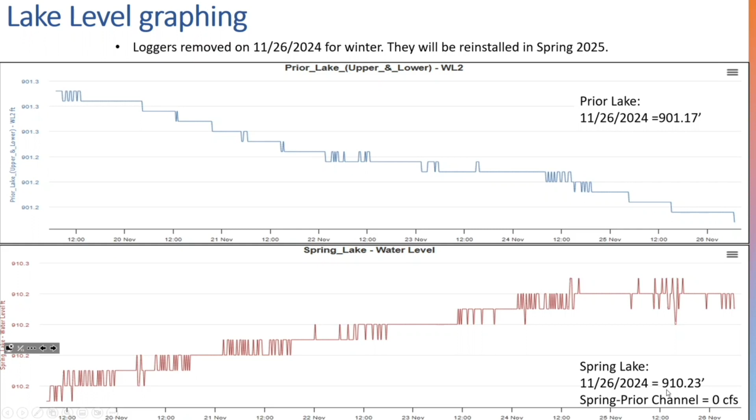For the lake level ending of the year, 2024, Prior Lake is at 901.17, and Spring Lake is at 910.23. The lake level loggers have been pulled for the year, and we will install them as soon as possible in the spring. One comment on this, the graphing, I think we figured it out, and overall we've heard good feedback this year on our lake level graphing website, and we're pretty thankful that we got that dialed in.

We've been reaching out to ice observers this past month, and we have gotten reports that Upper Prior Lake iced in, which is how we define that, when the lake is 90% covered, on December 2nd, along with Fish Lake and Spring Lake. Lower Prior Lake officially iced in on the 11th. On Upper Prior Lake, we've had data from residents shared with us since 1966. Overall, the trend seems to be climbing, though each year is a little different. Sometime between November 23rd and December 7th is pretty average, so this year we iced in sooner than typical. Always interesting. Thanks to all the observers for submitting their data.

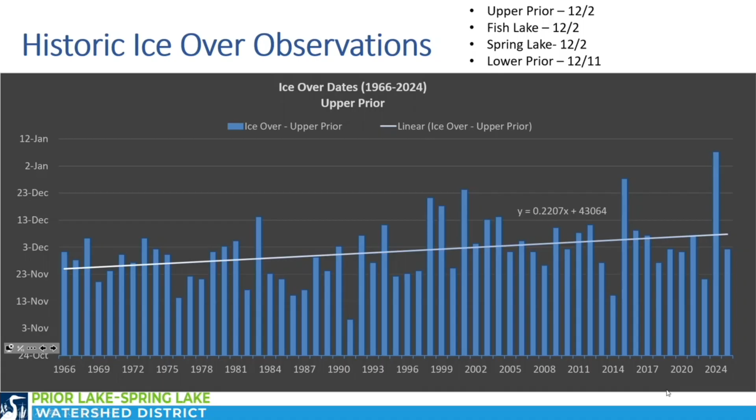I'll be talking about the 2024 lake water quality results. These results were a culmination of annual sampling that included 12 bi-weekly events. I'll go through the Tier 1 lakes, which will be Lower Prior Lake, Upper Prior Lake, Spring Lake, and Fish Lake.

Our sampling team at Three Rivers Park District samples total phosphorus, chlorophyll A, Secchi disc, total nitrogen, and chlorides. To compare our results to state standards, I'll be mostly focusing on total phosphorus, chlorophyll A, and Secchi disc. The state standards are based on data collected between June through September.

For these results, I analyzed trends and we made report cards. The report cards provide grades based on state standards, frequency and amplitude of the lab results, the seasonality, and the statistical significance of the trends within the last 10 years. These report cards are all available on the district's website, along with the annual data and historical trends.

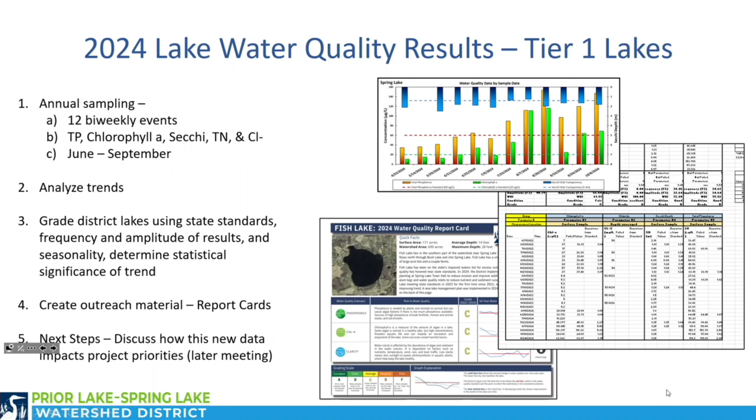Lower Prior Lake has remained steady, and on all these report graphs and results, we'll want to focus on the right side of the graph in 2024. The blue lines indicate Secchi disc depth, that's how far you can see into the lake. The dotted line indicates the standards. In red and orange, that's the phosphorus, and in green, that's chlorophyll A.

For the red and green analyses, you'll want to be beneath the dotted lines to meet state standards, and for the blue Secchi disc, you'll want to be below that as well.

Overall, Lower Prior Lake is looking good. The lake grades here are A's across the board, with phosphorus improving, and a non-statistical trend in chlorophyll A and clarity. This is our lake that we like to hold as our standard, the water quality that we want within all our lakes.

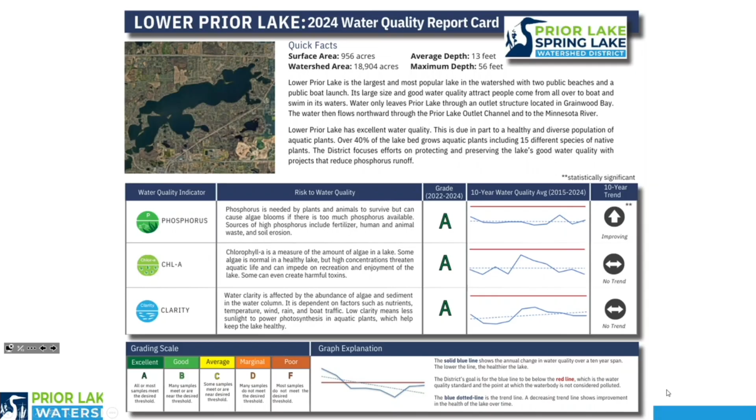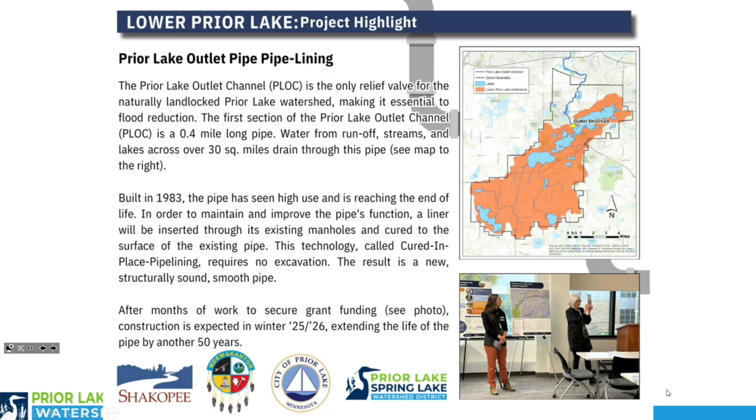On the back side of the report card, we have a project highlight on all the lake report cards, and on this one we're highlighting the pipelining project.

For Upper Prior Lake, overall there's a near-term trend of rising total phosphorus. We've been meeting the Secchi disc depth, and the chlorophyll A is also below the standard this year.

Upper Prior Lake has received A's across the board. Over the long-term trend, the lake is improving significantly across all three standards.

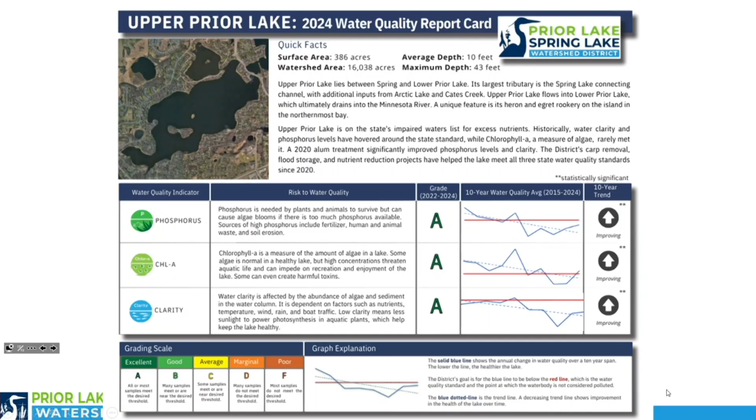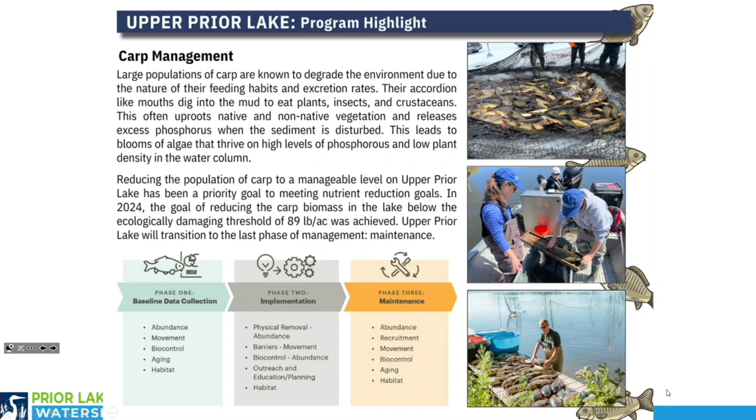The program highlight for Upper Prior Lake is our carp management program. We've been working really hard to meet the ecological threshold to go beneath 89 pounds per acre, or 100 kilograms per hectare. I'll give a little preview here and share that we have exceeded this goal, we're very happy to see that. We're hoping that carp management work here has made a big difference in water quality.

For Spring Lake, this year we saw nutrient results climb. Both total phosphorus and chlorophyll A are exceeding state standards. We did meet the standard for Secchi disc depth. So for Spring Lake, our grades are B, C, and B.

Over the long term, results are improving, though you can see this year there was quite the climb in each one of these categories. The highlight on Spring Lake is our ferric chloride system.

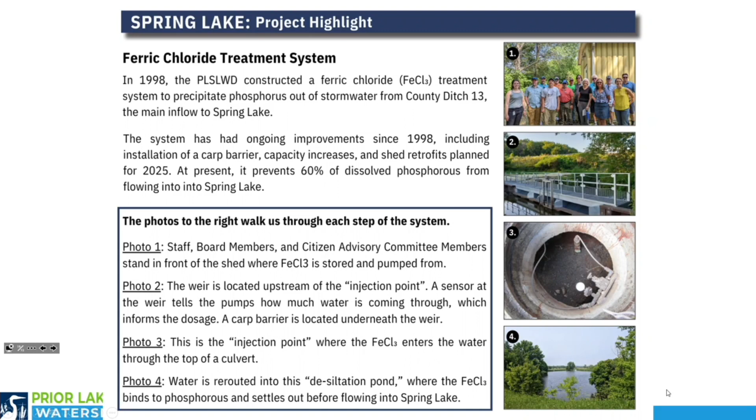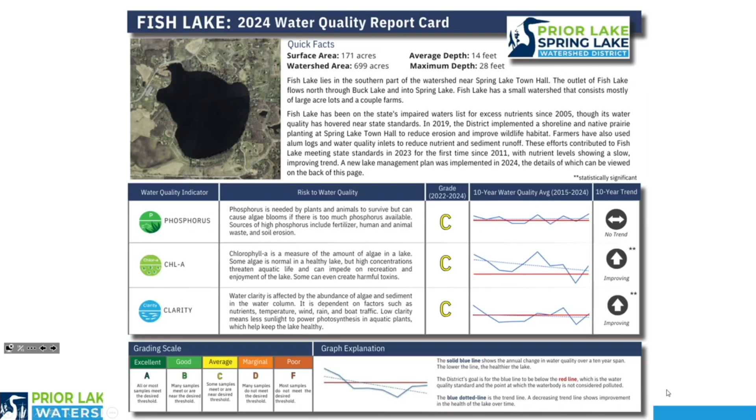We are working on implementing the lake management plan and we'll be following up trying to meet these goals here. Fish Lake received C grades across the board, and over the long term the lake shows improvement in this 10-year average, though long term, greater than 10 years, the trend isn't strong. So our highlight here is our management plan.

So what are the takeaways from our annual lake water quality data results? Well, heavy rains this spring flushed a lot of nutrients through and into our lakes. Results show declining trends across the board. June was among the wettest months on record, which typically doesn't bode well for good water quality. Lots of nutrients entered and came through the system here.

This shows that Fish, Spring, and Upper Prior Lakes remain susceptible to external loading. So next steps, we're going to continue looking into how external versus internal loading impact our lakes.

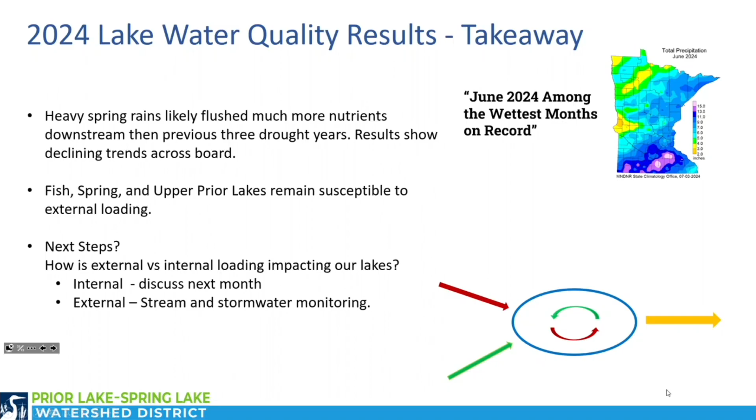I'll be diving deeper into water quality data next month, looking at how bottom phosphorus is telling a story about how some of these alum treatments that have occurred on Spring and Upper Prior Lakes are reacting to the system. Then I'll expand in the next section about how we're monitoring external loads through stream and stormwater monitoring, which ties into additional projects geared towards improving those loads.

So Zach Nagel, our district technician, helped provide me slides. This is an update on how staff are utilizing the WISKI database. It's been instrumental in how we're storing and using current and historic district data. Right now we're building tools within this database to analyze complex data sets.

I'll guide us through how we're creating outputs, and we'll focus on a station location here where this red arrow is located. This is a site along County Ditch 13. Our site name is County Ditch 1.

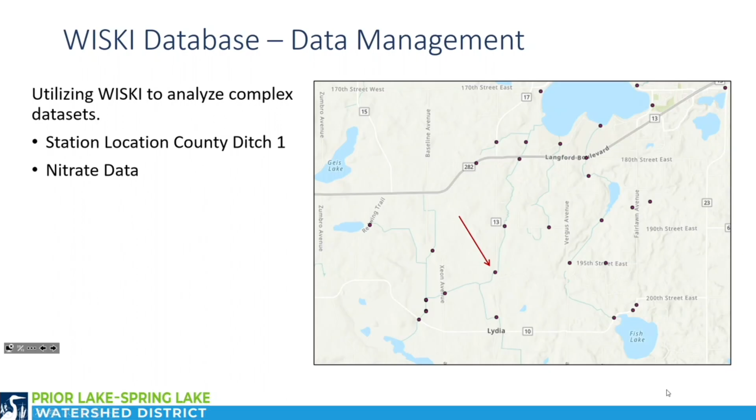I'm going to talk about how nitrate data is being analyzed. Within WISKI, we can house, store, and view our continuous water level data. This is data collected through sensors that staff installs in the stream. These sensors collect measurements every 15 minutes, and we can build long-term level data sets.

So this red line is just water level against a stage or an elevation on the left. This shows 3 years of data, so we have many, many years of data for many of our sites.

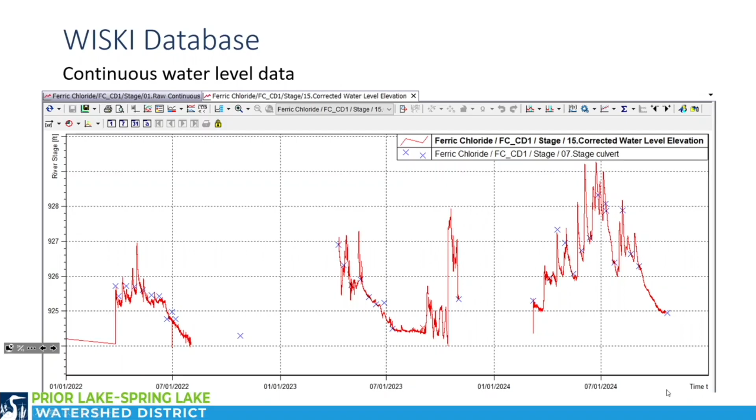Within the WISKI Database, we use a rating curve manager called SKED. We build relationships between water level and discharge. We take field measurements that show how much water is moving through a particular location at a particular water level height. So we build these curves that use our stage data, and then we can compare that with how much flow is going through that site.

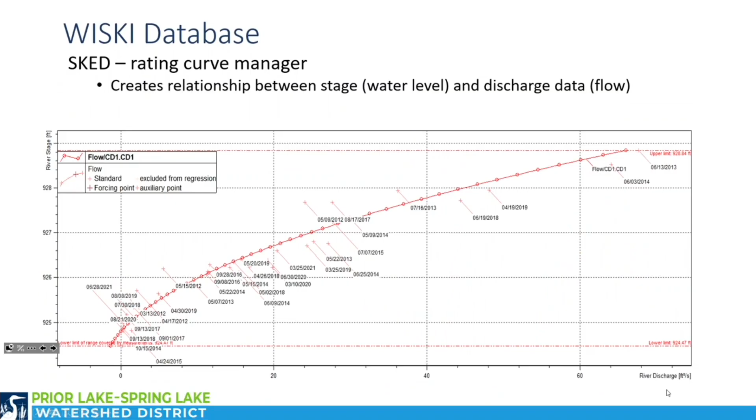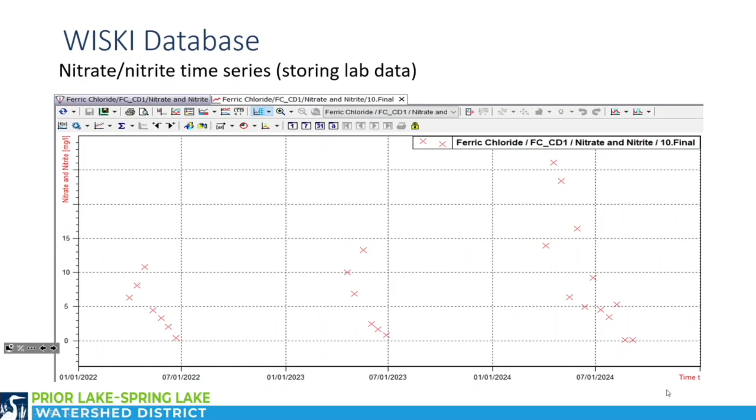In addition, WISKI is used to store our lab data. This is time series data. It's convenient to review data to show, for example, nitrate. We can use many different computations to display averages, building complex equations that I'll explain in the next slide.

So if we put all those together, we can calculate a load or a mass of nutrients through a station over time. This can tell us on a given year or over a defined interval how much nutrient has passed through a specific location. This is used to pass to our engineers and project managers to design projects and BMPs. It shows where potential hotspots, where problems occur.

Using WISKI, we can build this tool, and then easily - so the building is the hard part, which is what we're working on - but for future uses, this tool is a click away from analyzing the data for next year.

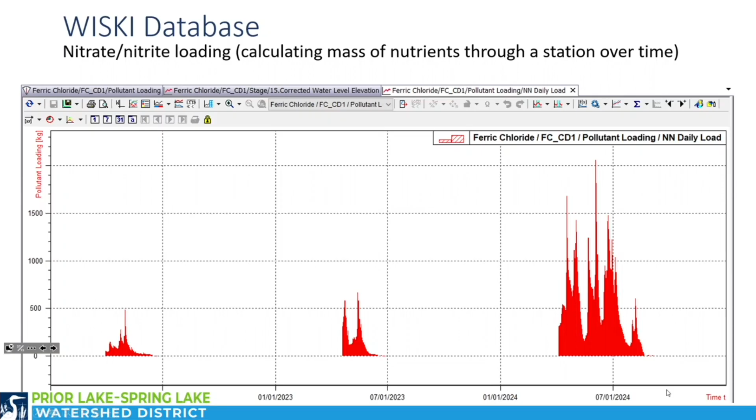So what does this look like? We can compare year to year how much nutrients are going through. Say we put in a BMP, we can define the improvements that BMP provided, and then evaluate what the effectiveness of that BMP made, and then compare that and share that within our goals.

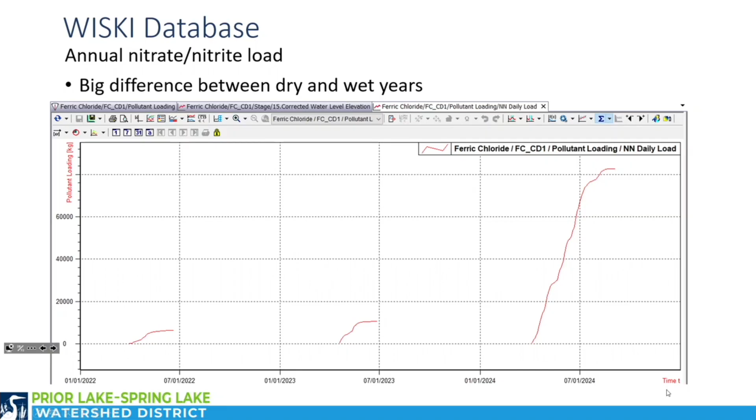So WISKI Database is already proven to be quite helpful in quickly analyzing and sharing our data. So what does this mean? Well, monitoring allows us to identify problem areas, monitor changes, predict benefits.

Something that was discussed at the annual watershed conference was that Comfort Lake, Forest Lake received the highest amount of clean water funds in the state. I'm not sure what the time frame was, but they contributed this to their monitoring and their high quality data sets. So we've already, we have really strong data sets.

We're going to continue building and transforming them to better align with our projects and help reach new funding sources with our data. So most grants require data that aids in getting those funds. So we're excited to use this WISKI tool to benefit future needs.

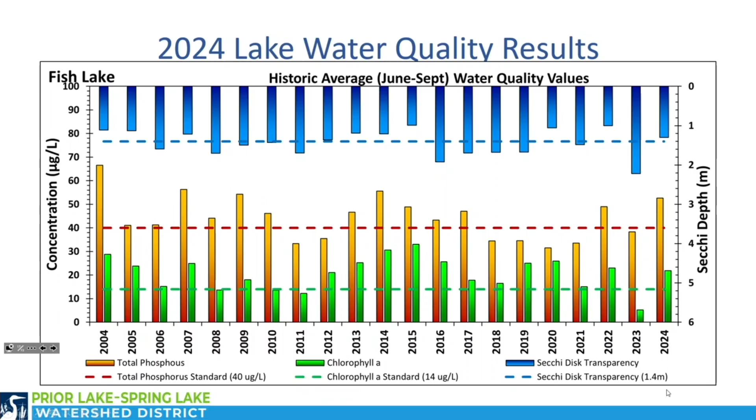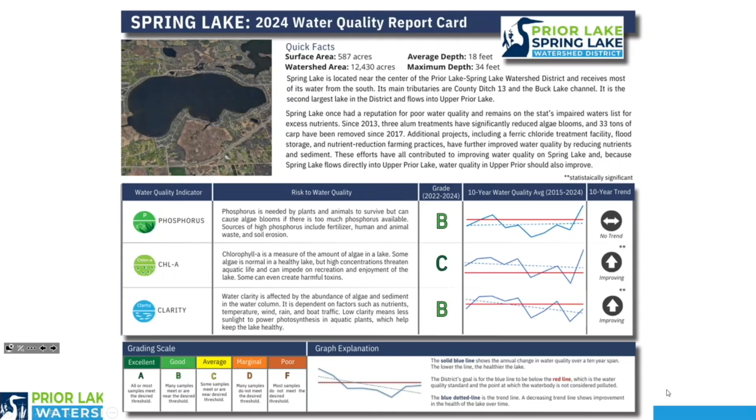Now, Spring Lake is also a deep lake, but it's got a site-specific standard that was created through coring. The district put forth an argument to the state based on coring evidence that pre-settlement, the load to the lake was higher than the state standard, and advocated it to be 60 for Spring Lake. MPCA accepted that argument based on the coring analysis, and it was changed.

It was somewhat contentious at the time. There was a population that fought that a little bit. There's some history on that, but that's just history.

So in addition to the phosphorus standard being raised, the chlorophyll A was also raised from 14 to 20.

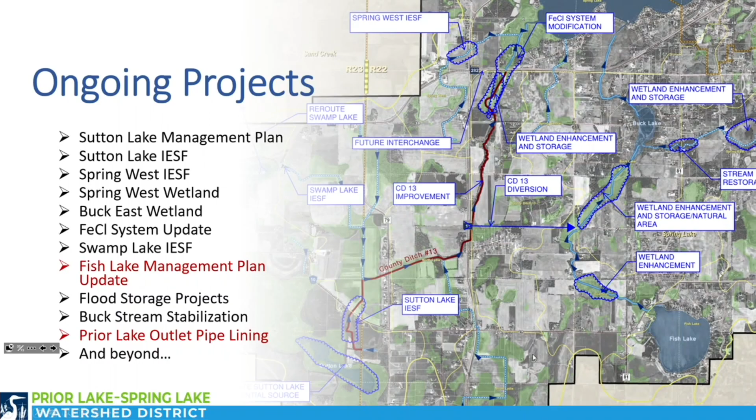Okay, thanks for warming up the mic, Jeff. I'll be really brief today, just touching on some work we are doing on Fish Lake Management Plan implementation, and the pipelining, so that it can be heard at this meeting space.

So the update for Fish Lake Management Plan is that we are focused on reducing nutrient loads that are coming off of the landscape. This last year, one of the projects identified was a field that had come back in our soil sampling as very high in phosphorus, which is the primary nutrient that contributes to algal blooms and can be a problem for lake health.

So we worked with the farmer managing that field. Farmers have a self-interest in knowing the nutrients of their fields. They don't want to pay for inputs that they don't need that are naturally in the soil. This farmer we've worked closely with in the lake-friendly farm program manages the field to manage nutrients and retain soil through cover cropping. So very good relationship here.

There were some built projects proposed to treat and filter water coming off those fields. Our partnership with Scott Soil and Water Conservation District proposed that while those built projects are great, maybe a first step that would be cheaper and easier to implement today would be to work with that farmer to keep it in rotation of crops that are going to draw down those nutrients, and help that farmer do grid sampling, which basically tests how that's going.

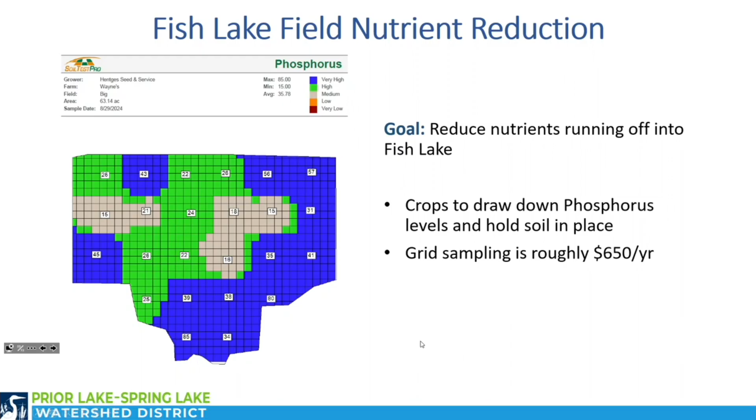The other project I wanted to cover was the Prior Lake outlet pipelining. As mentioned in meetings past, we're looking at lining our pipe, which is aged, to maintain the structure and also increase the flow. We had begun that work in 2023.

Since we have received a grant award and got that agreement signed, we've been able to renegotiate with the engineer on how to adjust their contract, which was originally for 2 years ago. So that is moving forward, and we'll be seeking authorization to bid for the pipelining at the special PLOC cooperators meeting on January 7th of next year.

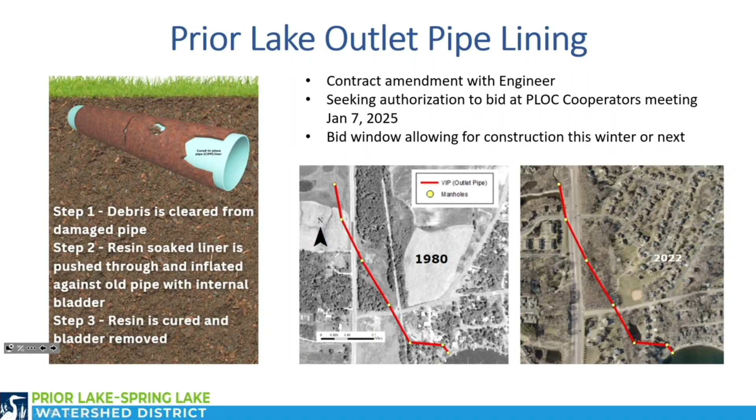Presuming that authorization is approved, the bid window that would follow would allow for construction this winter or next. It's likely next winter, but we want ideally to get the bid advertised as soon as possible, so that if people do happen to have a window and a short workload this winter, we can get this done. So that, I believe, is all I have, if anyone has questions.

Any questions from the board? I know we discussed a lot of this at our workshop. All right, thanks Emily. Is that it for programs and projects?

Okay, next item is we're going to talk about the ferric chloride system assessment. I'll open it up and then hand it over to Brett Emmons from EOR, who's here. I just wanted to give you some overall context, and then Brett will dive into the technical expertise from the podium. Because this work task has been spread over multiple years, I thought it would be good to review where we've been and when things came through.

The first thing I want to organize our brains around is in 2023, we did wave one of this work, which was really to look at the nuts and bolts: is our tank going to hold, and how long? Make sure that our equipment is safe and operational. 2023 was a drought year, so we weren't able to do jar tests, which were critical for the optimizing part of the system. So that work was done and completed this year. You'll see that the report was phased.

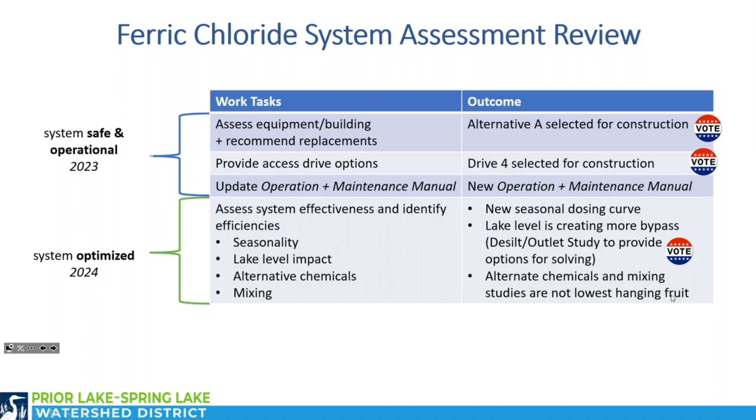And then lastly, an outcome is that although alternate chemicals and mixing studies were conducted, there were some that could provide slight increased efficiencies or unknown. It's not the lowest hanging fruit. It doesn't seem to be the first item to attack to get efficiency in our system.

So I just kind of wanted to give a general orientation. You'll see a lot more detail. And then I also wanted to remind or set the expectation that because of these phases, it's not a living document. So the original system equipment assessment, we've replaced things as they've malfunctioned, so that it was written in that time.

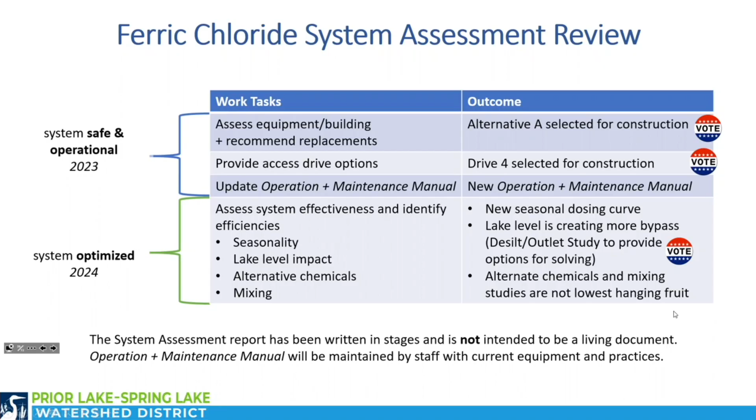However, the operation and maintenance manual is where we intend to keep that current and annually updated. So I'll end quickly on what we're voting on today. You have seen there's several votes that have already occurred. Today is focused on if you would like to vote, the vote would be accepting the system assessment report. What that means is that you're not committing to any action, but you're accepting EOR's professional opinion from the report. And if you don't accept, it would remain as draft form. The report would still exist, but it wouldn't be cited in future plans or reports. So this is really a paperwork keeping step of the work that's been done here.

With that, I'll hand it over to Brett, and we'll just do a slight PowerPoint transition here. And it looks like Brett's not seeing his screens. Would you like to come over here, Brett, so you can see what you're presenting? Otherwise, I'll look up there, but yeah, now it's gone off. Maybe I will go over there. Yeah, our screens are, oh, there we go. Oh, it's back. Check it now. This one hasn't been on since I walked over, so I don't know. Why don't you come? It's nice to see. Turn this mic off. There's always something.

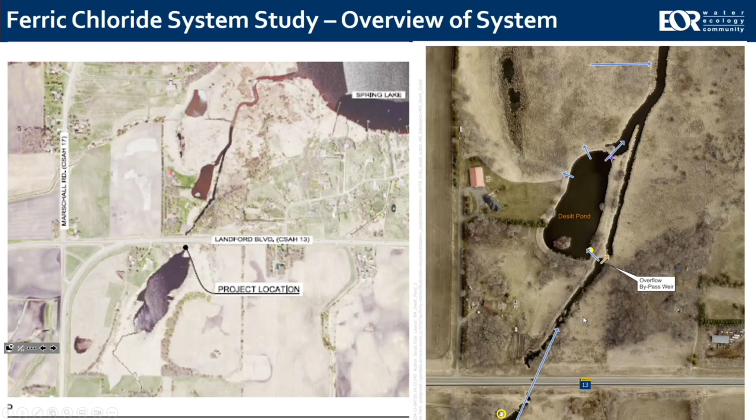So just touching on the things you've already been through, so I'm not spending much time on this. You evaluate the current system, came up with recommendations. Really the bulk, or I would say the majority of the emphasis was getting at the idea of what is the status of the tank and all the operating equipment in there, and the building, and what type are your options of trying to redo all of that. That was really the main emphasis, and we were able to move forward with that.

So that's great. Took a look at all the old equipment and different sensors and made those modifications. So you really kind of move forward with that, and I'm glad Emily mentioned that. I think that has definitely professionalized the operations plan for the facility, and just made sure we have some safety features included in there too.

Since these treatment systems are very typical in, say, a water treatment plant, if you're delivering potable water to a city, or in a wastewater plant, they usually have a lot of operators and a lot of people and a lot of experience with this. This is really a unique setting where we're coming out to a surface water and applying this chemical. That's also one reason why the MPCA - they don't see many of these, I'm not sure there are any others I know of - so they do take a look at this and try to be very cautious that we're working in a natural environment as we're doing all these things.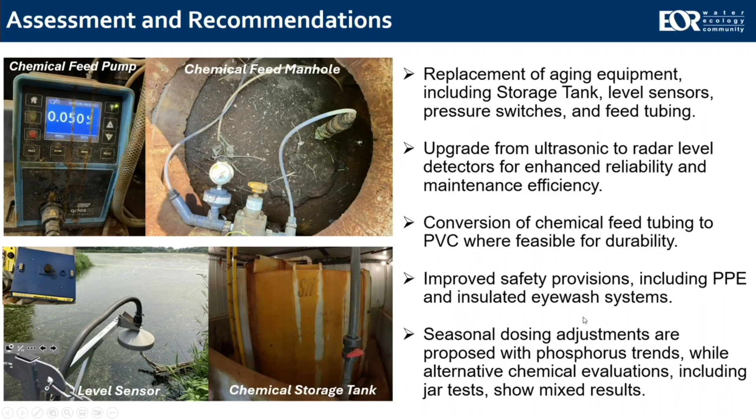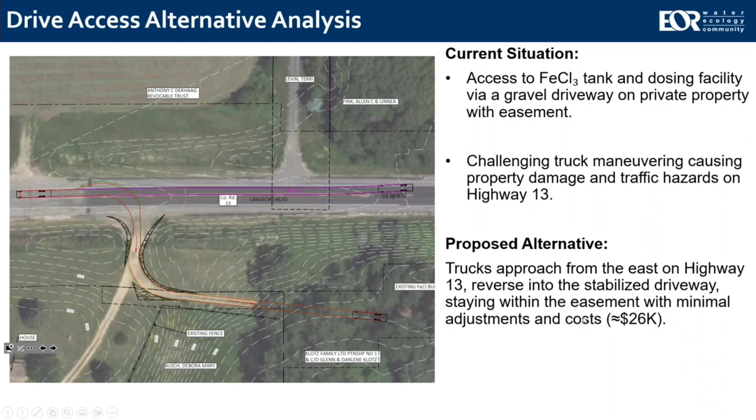So it is unique. As discussed, originally we thought we'd just look at two different driveway options after trying to work with, be very cooperative and work with the local landowners, and just thinking through it. That ended up expanding into four different options, but we were able to come back to this more minimal approach, which I think saved the district some money and was just a more practical approach of how to make sure we can get in well with the chemical access.

So we had the interim report where you saw a lot of this content already back in September. Previous year, you authorized the design to move forward, and then you now have already moved forward with construction, replacing the tank. I think you were kind of fortunate. We had sort of expected that the building would likely be up for needing to be removed, but as we got into it and looked at it further, we felt like it does have a bit of life to it.

So then we started looking - can we just remove one side to be able to take the tank out? It took us a little longer to work through that, but it was really, I think, an overall benefit or savings to the district that you were able to repurpose that building, because it really was in very workable condition. Whereas the tank and things were really getting at the end of their typical lifespan, so you're starting to kind of live on borrowed time.

So the pieces that we still needed to fill in as we got that additional data the following year when we had some flows in the system. One of the things that Emily suggested needed further investigation and some more modeling and a more detailed look at - but we had suspected, and we just wanted to go in and take a look at the data - was when Spring Lake gets high, you're basically backing up the entire system. So it tends to come and just sort of flood the pond.

It floods the weir, and at some point, when the water is coming into this high situation, it's just as easy for the water to go straight down the channel over the weir as it is to get pushed into the treatment area. So in that case, you do have possibly some water going in and being treated, but then other water that just wants to take that straight path and go on down to the lake without being treated. So it's a challenging system, but it is what it is. I think it's definitely important to look at that and see whether there's anything else that can be done with the weir or the configuration, just to make sure that when we are dosing the water, we're getting as much of the water to go through the system as possible.

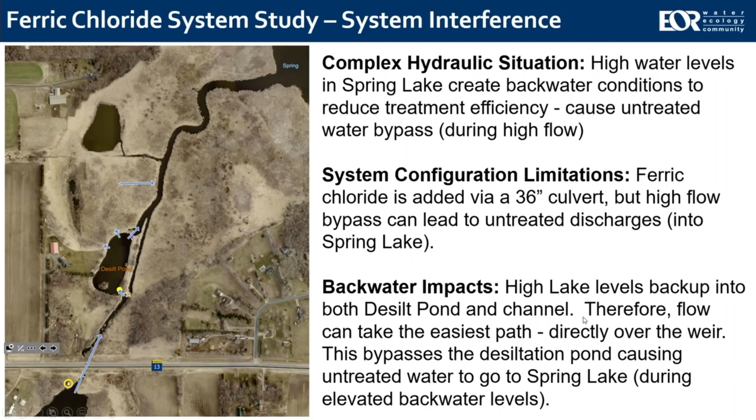Here's an example, a photo from 2023 where the water wasn't even all the way to the top of the weir, but the water takes a longer, harder flow path to get through the pond, so it was starting to flow over the top of the weir down the system.

In the report, there are some graphs that look back at historic data. We picked this recent one from 2024 as an example. The blue dots plot the lake level, which backs up into this area. The green line is the outlet of the desilt pond going back into the ditch. You can see there are major times of the year where that is already being ponded.

In the past, there were some small outlets trying to push water out to get additional filtering in the wetland, so all of that is kind of backwatered. As you get up to the red line where the high flow bypass weirs are, there were significant parts of the year when there was more flow occurring, the lake was high, and we were getting that potential for water to just go straight down the ditch and not get into our treatment system.

That's one thing we suspected was the problem just from anecdotal observations being out there, and we're able to basically quantify that a little better with this kind of data analysis, looking back at historic data, since we have some really good records to work with.

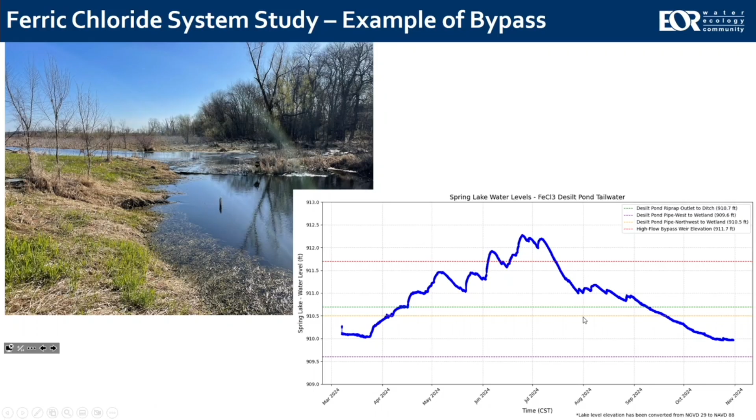So now shifting into the next piece of this: you did some jar testing and came up with a dosing curve some 25 years ago or so. It would make sense to take another look at that, since we now have a lot more years of monitoring data on the system.

We'd like to look at the monitoring data and do some of this jar testing, or bench testing as it's called, to see in an ideal situation whether the chemical being added is effective. We know ferric chloride is fairly effective and used by a lot of entities, which is why MPCA permits it in this natural condition. But we wanted to see if different doses mattered, as well as what other chemicals we might want to look at.

Here's a graph: the orange shows rainfall throughout 2024, the blue is the ditch flow at the weir as it crosses under Highway 13, and the green lines are the times when we took samples in the spring and summer, so we could have a couple different data points of the system to look at.

Jar testing has probably been around for 50-plus years. It's basically what we call a bench test. You take your sample water, bring it in on a bench, put it in jars, and then add your coagulant, in this case ferric chloride or one of the other chemicals. There's a little paddle system, so you can set up a whole series of jars with different doses in each one.

The paddle will twirl, usually going through a fast twirling phase that creates coagulation, then a slow stirring phase that simulates flocculation. As the chemistry happens, you start to create small flocs, and for better settling, you want those small flocs to come together and attach to each other, so they settle out faster and better.

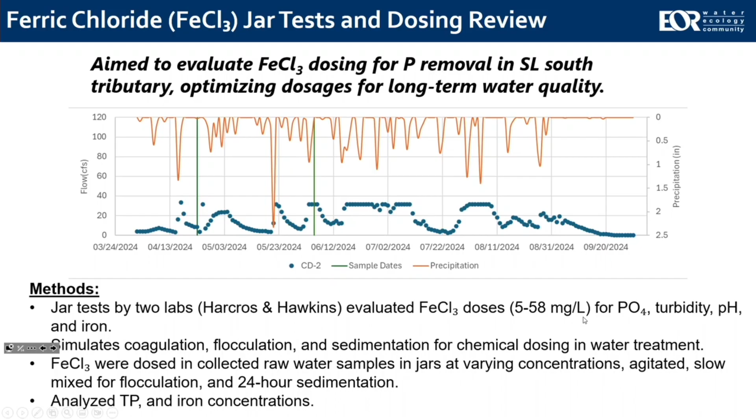There's already a background concentration of iron, there's TSS, there are other things, and part of what you'll see here is we think there's also probably some other chemistry happening in the water that could be interfering with it. There are some things that actually compete for that iron, so instead of the phosphorus being able to get it, some other material may be binding with the iron, and so our iron's going out for some other reasons. So we have some of that background information, which is good.

So here is a time series of the phosphate, which is the form of phosphorus that's dissolved and hangs around in the water that we're trying to target. The data from the district is the blue dots, and then we had the two labs that said they would do this free of charge, and the Hawkins one seemed to correlate. They're using different lab techniques, so it's not uncommon to have some different results.

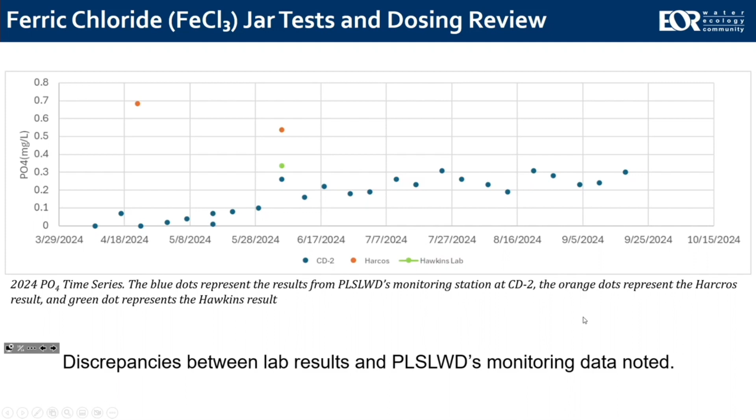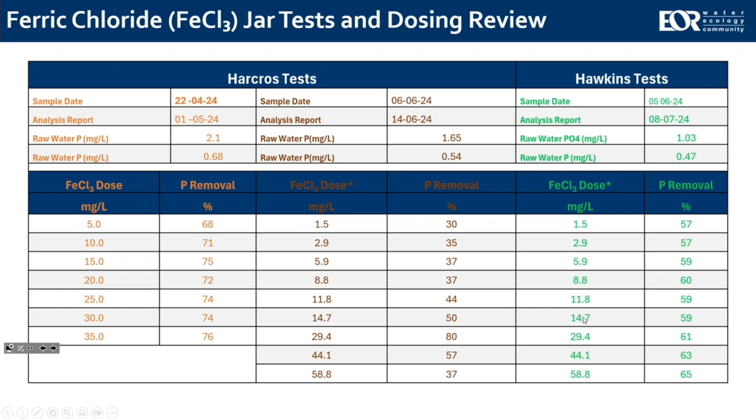The Hawkins one did have a better match with the overall data, but relatively speaking they're all of interest. I think Hawkins was probably the most representative of the actual phosphorus concentrations we were seeing. I don't need to go through all the tables in the report, but this goes through all the different dosing amounts used, what removals we got, and what that would look like. Part of that probably shows up better in this graph.

This is the implication that you are getting in the early months and late months of the season your existing dosing curve is probably looking good, but you are having higher concentrations come through in the middle. So the main conclusion we came to was to talk about the dosing of the ferric chloride and go with a higher dose during those summer months to adjust your curve. You can stay with the existing curve in the earlier months, go with this in the middle months, and then go back to your original curve.

There are some limits to how much iron you're allowed to discharge under your permit, so you'll need to continue monitoring this, because we think there's ability to put more iron in and get more capture, but we need to monitor that at the outlet to make sure that plays out in real life. We've tested it in the lab, but now we need to see how it plays out here.

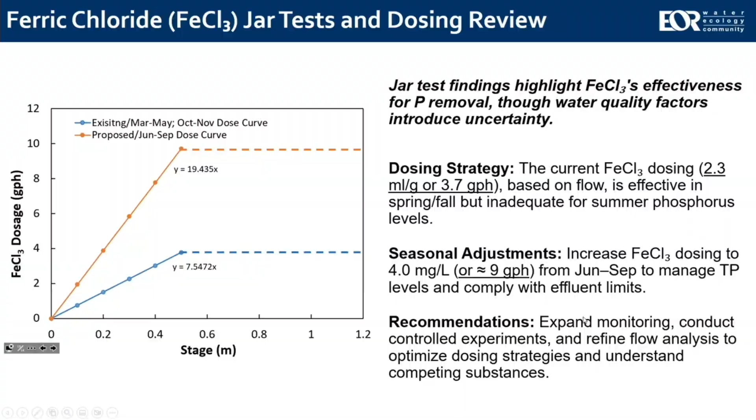Jeff does a great job, and all the staff here, so we'll just need to monitor that and see how that actually plays out. So we gave the recommended update to the dosing curve. If I missed anything, please pipe up. I just tried to hit some of the highlights and let you know. So this brings that full report, those missing pieces, all together into one spot, and it's kind of lengthy.

It's good that you've gotten, after all these years, I think it's great that you're actually seeing all these things being implemented and being done, and things are being updated. I'll take questions now.

Any questions? Manager Tofinelli? Brett, thanks for that presentation. I did have some questions.

On the report, ignoring the errors that are in the report that I reviewed last evening, there's a number of errors and references to charts and errors that I think should be corrected before it's submitted to the board. We'll go through and clean things up.

I'm a bit curious on some of the material selection. One being, when you look at the storage tank and you go with high-density polyethylene, why there seems to be the desire to go to PVC in your tubing, when that's generally considered an inferior material to high-density poly, and why the tubing system isn't in high-density poly or even cross-linked polyethylene, better yet.

I will have to check with our treatment specialist that deals with all the equipment side. Make a note of it. I've mentioned this before, that's really, I can't understand the engineering and why we're doing that. So that was one question I had on material selection.

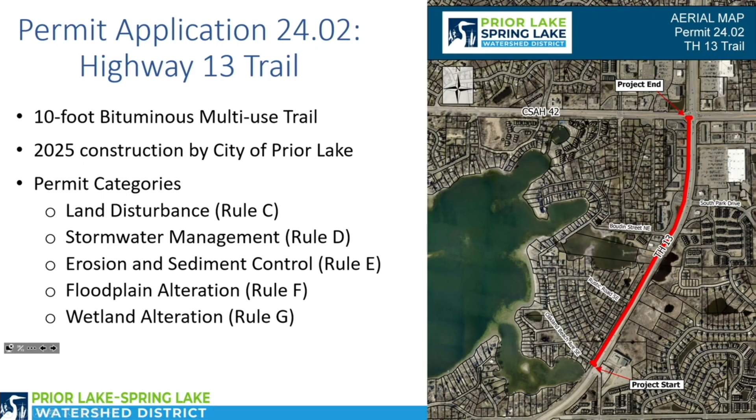The project results in a net increase of 1.15 acres of new impervious surface. Of that, 3/4 of an acre are actually exempt from District Rule D for stormwater management. Our rules include an exception that says if the project is a multi-use trail, bituminous, 10 feet or less, that is buffered on one side or downstream, so its drainage is going towards a vegetated buffer strip that's 5 feet wide, that new impervious is exempt from the rules. So a large portion of this trail met that requirement.

So the trail is draining to a vegetated buffer that was 5 feet or greater. What that meant was that ultimately about a half an acre, or 0.48 acres, had to meet our rules for stormwater volume control. That resulted in the need of about 1,742 cubic feet of volume control. It appears this project will meet that through the use of 5 best management practices. There is also a retaining wall proposed along the trail to minimize wetland impacts.

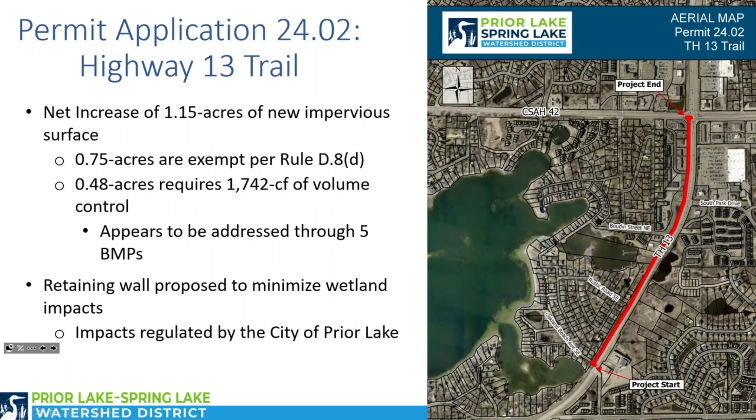The city of Prior Lake is the LGU that regulates wetlands and wetland impacts, so the city kind of gets to regulate themselves as it relates to the wetlands. Staff reviewed the project and brought forward some comments that are included in the report and the application that was in the packet. The first is just to provide additional documentation for the city to support the stormwater volume storage. It looks like the 5 BMPs will meet the storage requirements, but we need additional data so that we can actually verify that volume storage has been met.

Staff is also proposing some construction plan revisions to better depict one of the BMPs and to add some additional erosion control measures. The applicant needs to submit a signed permit — the permit right now in the packet has not yet been signed — and they also need to submit signed construction plans, and finally to submit a performance security by the construction contractor. We received a completed permit from the city on November 21st. By statute, we have 60 days to take action on the application; that 60-day period goes out to January 20th. The board basically has three options.

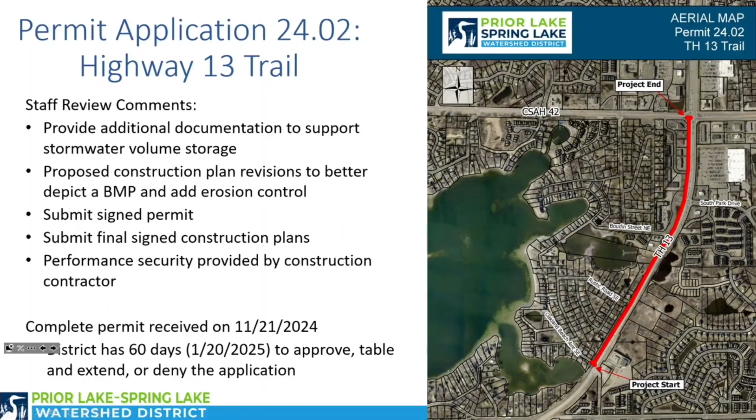Option one is to approve the permit. Second is to table it and extend the permit if there is additional information or requests that the board would like to see, or to deny the application. So staff recommends that the board approve the permit application for the Trunk Highway 13 trail, subject to the conditions noted in the permit application and staff review comments.

Okay, thank you. Good report. So it is a project for a trail in the city of Prior Lake, and we are looking at approving the permit application. A motion would be to recommend option one, board approval of the permit application for the Trunk Highway 13 trail subject to conditions noted in the permit application and staff review comments.

Anybody want to make that motion? So moved. Motion by Manager Tofinelli. Second by Manager Burnett. Any comments on this proposed project or discussion?

I think it's a good project, and it looks like it's been well reviewed. I didn't know that about our rule that we exempt 0.75 acres, but that's good. We're following our rules. If everybody's ready to vote, all in favor, say aye. Opposed? Motion carries 4-0.

Now we want to move to item 4.4, which was added to our agenda, and it is a Spring Lake demonstration parcel survey. Emily, are you having that? I'm on it. Some of you may be familiar with one of the district's properties, which is a section of shoreline along Spring Lake, just near Shoreline Boulevard Northwest. It's an undeveloped section. We completed a restoration project as a matter of demonstration.

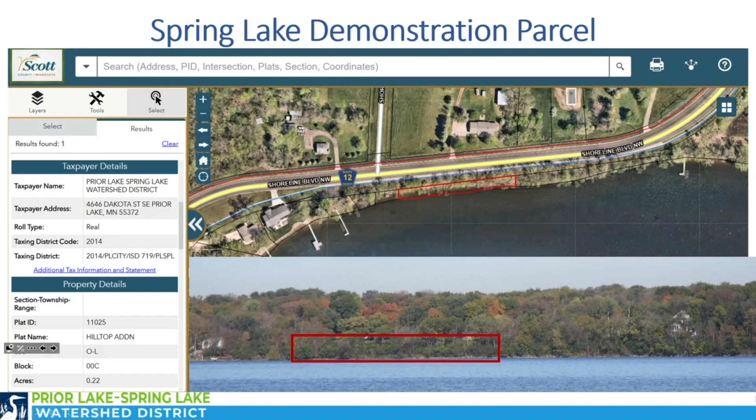So the proposed action would be a motion to approve the contracting of Valley Surveying for surveying, marking, and mapping of the Spring Lake demonstration site for an amount of $3,200, for execution by the district administrator, and with any further non-substantive changes on advice of legal counsel. Okay, very good. Any questions on Emily's report?

Anybody want to make the motion as contained in the memo? So moved, by Manager Burnett. Seconded by Manager Tofinelli. Any more discussion on this item? If not, all in favor of the motion, say aye. Opposed? Motion carried. Okay, we're at the treasurer's report, and I am going to do that for Manager Morkenberg, who's not with us right now.

So what we have right now, as of November 30th, 2024, which is the date that Christian prepared the monthly report, we have $1,523,175 in available cash in our reserves. And we also have 1.8 million in restrictive and committed funds. So our total funding that we have is 3.384 million in total funds.